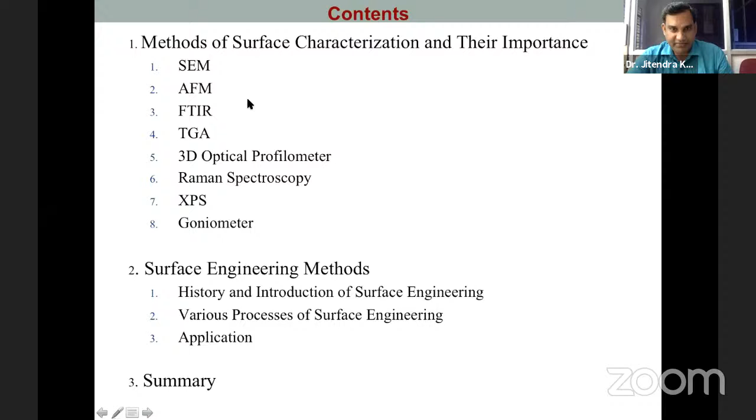So first, SEM is nothing but scanning electron microscopy, used for surface topography. The basic thing in scanning electron microscopy is that a high voltage electron beam falls over the surface, and when the high energy electron beam falls, it generates secondary electrons, as well as backscattered electrons, X-rays and Auger electrons. If the electron beam falls over the surface, you can see this type of envelope formed in that particular surface.

In this subsurface, Auger electrons are emitted, X-rays are also emitted, and secondary electrons from the surface are also emitted. These secondary electrons or backscattered electrons are very important in scanning electron microscopy. In Auger electron spectroscopy, we focus on Auger electrons. In X-ray, we focus on X-rays. So in one material, when the high intensity electron beam falls, every kind of electron is generated, but you take care of what kind you need, and the others, Auger electrons, X-rays and other things, you can suppress with the suppressor.

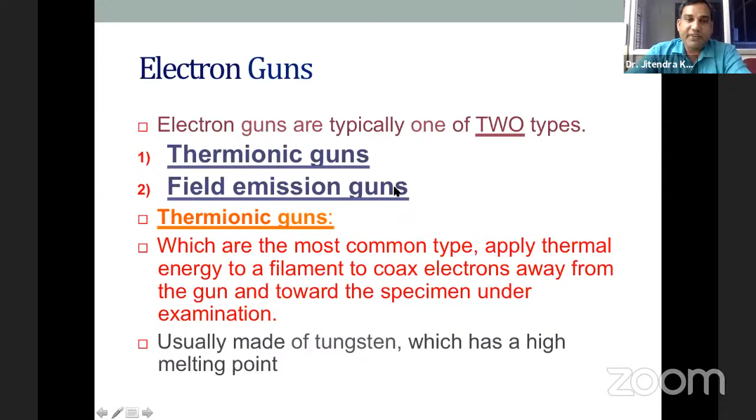So that's why field emission electrons are used, and this creates a strong electric field, so that your secondary electrons are generated and you will get a better surface topography. That's why everybody asks for field emission scanning electron microscopy images. And nowadays high resolution scanning electron microscopy has also come into the picture. So as you increase the intensity of the electron beam, your cost will also increase.

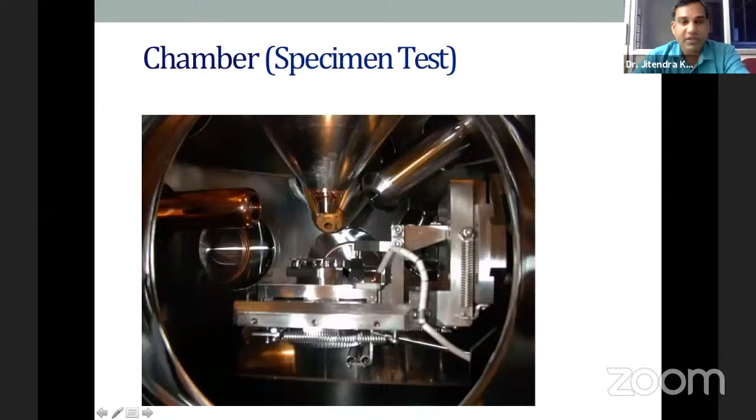So this is the close view of your specimen chamber, where you can hold your specimen. From the top, the high intensity electron beam falls over the sample, and these are the detectors. This is called a secondary electron detector, which can detect the secondary electrons emitted over the surface. This detector plays a very important role. It was developed by Everhart and Thornley, which is why it is known as the Everhart-Thornley detector, and it considers secondary electrons only; other electrons like backscattered, X-ray and Auger are suppressed by a suppressor.

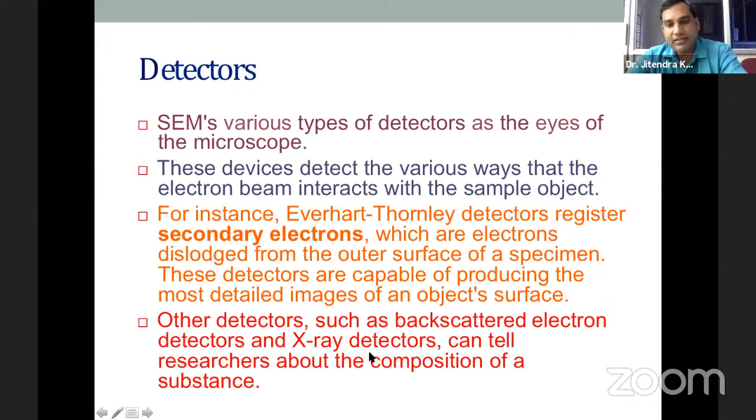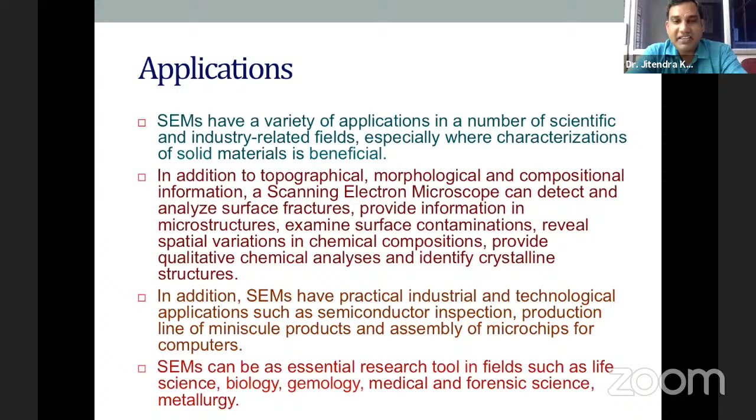So these are the segments you can see here. This is the EDS detector. You can generate very high intensity electrons and then perform the elemental analysis, and this is the backscattered electron and secondary electron detector. These detectors are very, very important when you capture any surface topography. Scanning electron microscopy has applications in every field, like life sciences, biology, gemology, medical, forensic science, metallurgy, and even mechanical engineering.

So I have taken a few sample surfaces of SU8 and its composite coating over glass, and this is the bulk coating which I fabricated to develop some MEMS devices. This is the work carried out by my PhD student, who recently submitted his thesis, and this work was published in the Friction journal.

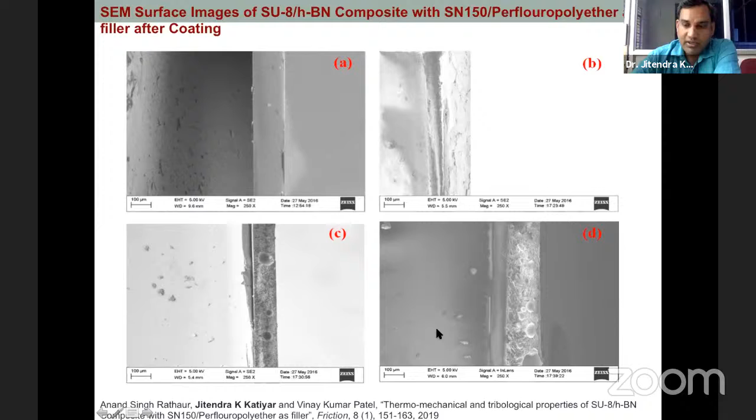So here you can see this surface coating: this is the substrate and this is the thickness of the coating, through which I can measure the thickness of the surface coating. And also, if I have added some liquid fillers inside the matrix, we can observe whether they are dispersed throughout the coating or not. That also we can analyze by this SEM micrograph.

And in this surface coating, when we added the liquid lubricant inside the solid matrix, the SU8 plus hBN, hexagonal boron nitride, matrix, we can observe the liquid perfectly dispersed throughout the surface. Due to this it gives a lower friction coefficient and high wear resistance of this coating. So this is the application of scanning electron microscopy.

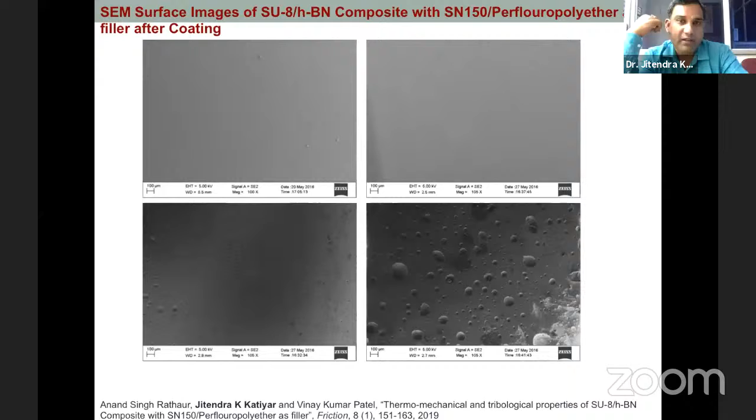Further, after scanning electron microscopy, we can also do some analysis by AFM. AFM, the atomic force microscope, is another important tool. Through AFM, you can observe the surface roughness of a nano coating or even a micro coating. Through AFM you can also generate the 2D surface roughness and the intensity of the particles, and further you can calculate the frictional force, nanotribometry, tribology, also through atomic force microscopy.

So this is another scanning probe microscope, and the atomic force microscope was developed by Binnig, by the simple means of contact mode. This atomic force microscopy gives you several aspects, like surface aspects and surface roughness. You can also calculate the friction between the atoms. You can draw the FD, friction force versus displacement of your tip. So this is a very important tool for atomic analysis, atomic force and atomic friction, and it is a widely used tool in tribology.

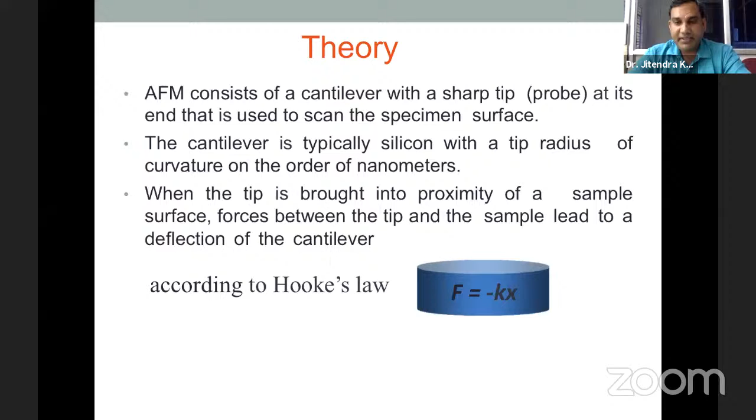Basically this tip works according to Hooke's law, and you can calculate the force between the tip and the sample surface by the deflection of the cantilever. The deflection of the cantilever due to the movement over the surface, we calculate by Hooke's law. So this is the kind of AFM tip which is used, and it is fabricated over a silicon wafer.

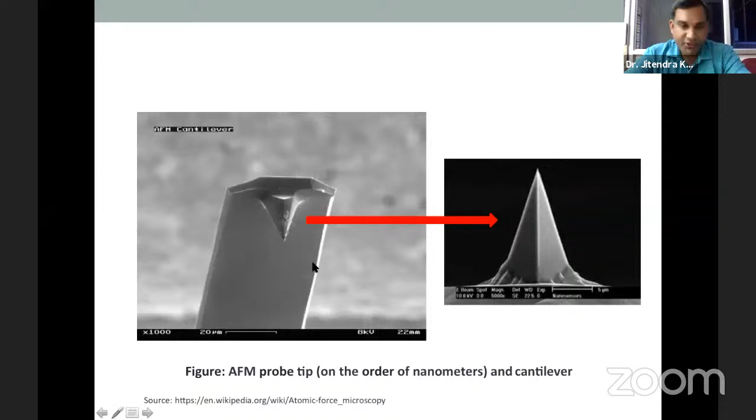In my PhD, I handled 3 pieces of equipment: this atomic force microscope, a scanning electron microscope and a 3D optical profilometer. These 3 instruments I personally handled, and I generated micrographs for students from other departments, like the biological department, who wanted analysis of their surfaces. One girl I know fabricated a foam with sol-gel technology, and I captured those images with this atomic force microscope.

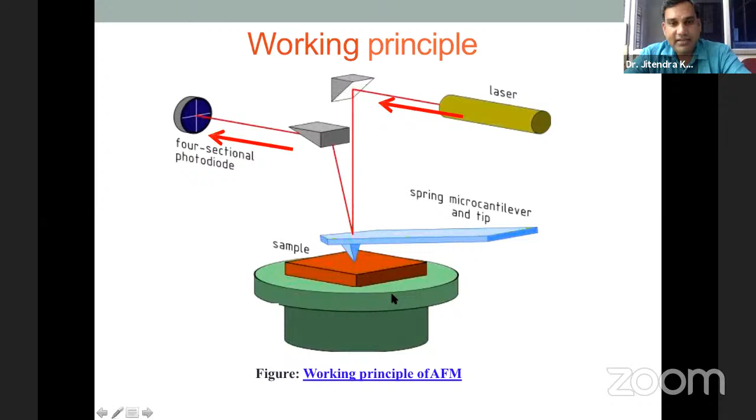So this is the basic feedback signal, when it moves over the surface in a raster scan. According to that, your cantilever tip moves over the surface. There are 3 modes we use in atomic force microscopy. If the surface roughness of the sample is very good, then you go for the contact mode. If your surface roughness is around 1 or 2 micron, then don't go for the contact mode, otherwise your tip will break.

So you choose which mode you want: contact mode, non-contact mode, or tapping mode. These are the 3 modes, and the selection of the tip is also different. All 3 modes have different types of tip, and one tip cost $50. That was in 2016. Nowadays I don't know what one tip costs.

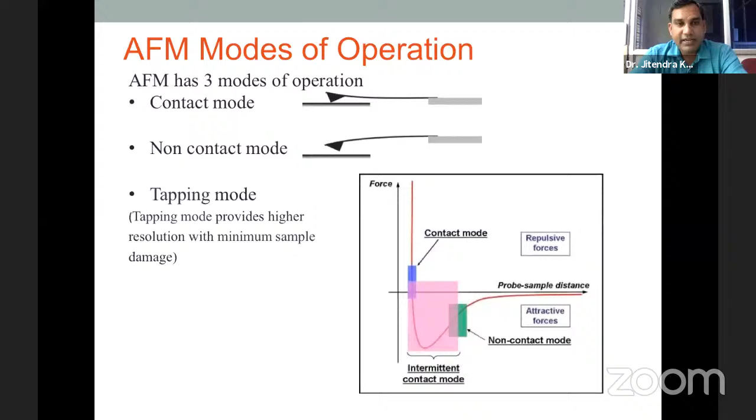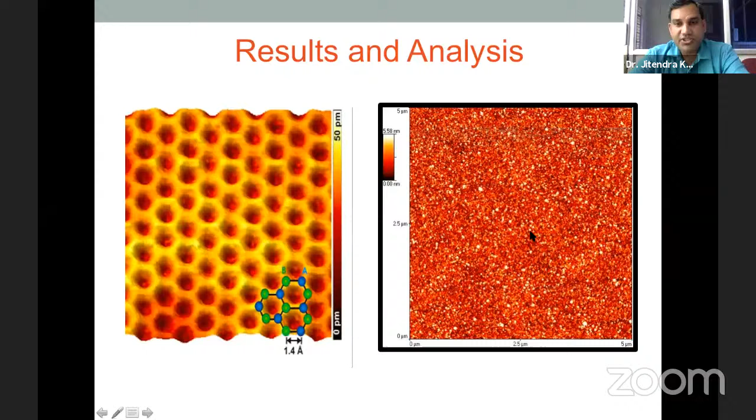For my own sample, I tested this SU8 and hexagonal boron nitride composite with liquid filler, and this gives me the insight that the coating I generated has nanotextures, because these nanotextures also play a very important role in wettability, increasing hydrophobicity and other properties, because the contact area is reduced, due to which the frictional forces are also reduced. So these types of images help me explain why the reduction in coefficient of friction happens, and the basic phenomena behind reduction of friction and increment of wear resistance. This can also help explain the wettability test, because this surface gives me more hydrophobic nature, approximately a 100-degree water contact angle.

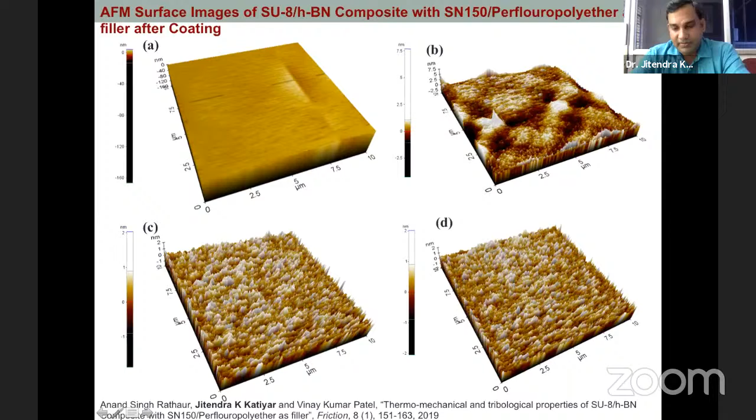Now another kind of surface characterization used is called FTIR. This FTIR is basically used to analyze the elemental bonding, whatever new bond formation happens in your sample, or what type of bond forms after mixing 5 to 6 compounds.

In that, the region from 0.8 micron to 2.5 micron is called near infrared. If you select this region, it's called medium infrared, ordinary infrared form. Far infrared is the distance between 50 micron to 200 micron. According to that, you can also calculate the functionalized group, whether any functionalized group is present in your compound or not. That you can also analyze using the FTIR method.

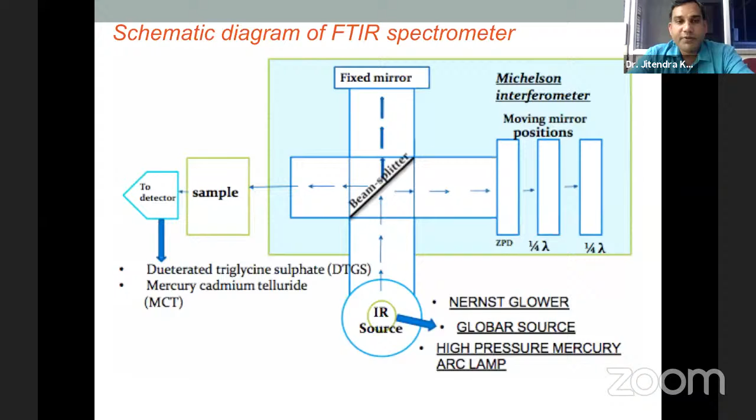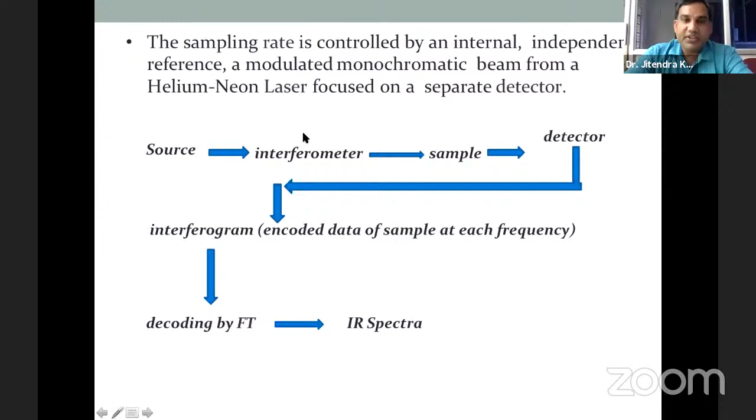The application of FTIR is either to identify organic compounds, structure determination, or chemical reactions. It's also used to analyze complex molecules - what molecules are present in your substrate. Sometimes a question is asked why a coating generates very smooth surfaces, or why adhesive nature is shown by a compound - FTIR analysis gives you a better picture of whether any new compound or formation has occurred on the surface. It's very good for explanation of whatever you are describing.

I performed this FTIR analysis on three carbon materials, and this was my first paper in my PhD, published in Tribology – Materials, Surfaces & Interfaces. In this paper, I chose three carbon materials and wanted to analyze which is the best carbon material among all - graphene, graphite, and MWCNT - which gives the lowest friction coefficient, and why.

I tested graphene, graphite, and MWCNT. According to the wavenumber and percentage transmission we tested, we observed that the hydroxyl group peak is very wide and large in the case of graphite, much less in graphene, and still present in MWCNT.

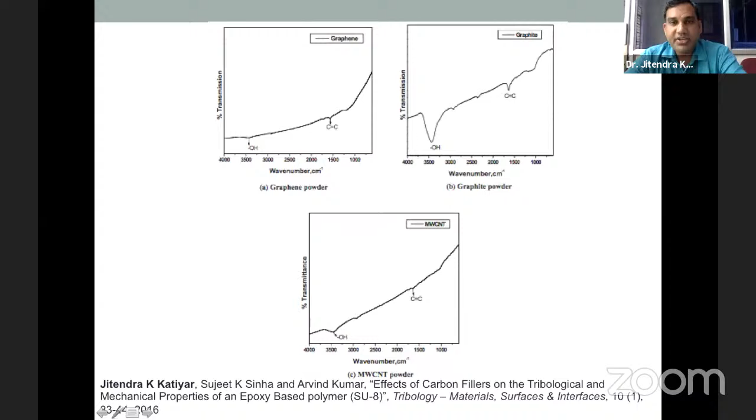Further, we move to another type of spectroscopy, Raman spectroscopy. In FTIR, what happens is the infrared falls over the surface and is absorbed by the atoms. Due to this absorption by atoms, sometimes if your coating is unknown or you don't know much about it...

...you don't know much about that particular coating, it's unknown. So don't go for FTIR in that case, because it will sometimes not give you the correct result. This is because the infrared is absorbed by the atom, and sometimes it won't give you the correct reason.

That's why Raman spectroscopy came into the picture. C.V. Raman discovered this Raman spectroscopy, and here also we use infrared sensors, but this infrared is not absorbed by the atoms present in the substrate. It only creates vibration, and due to that vibration in the atom, it can change the peaks and cause a shift in that particular peak.

It gives you very good results if you want to study new bond formation in your compound, or other analysis related to C double bond C, or what type of bond - sp2, sp3. These are the bond analyses we can generate by Raman, which gives more accurate results. But FTIR you will find easily, so FTIR is also acceptable in papers, but if you present Raman, nobody can question whatever you've mentioned, because it can generate the vibration between atoms, and the difference in wavelength between incident and scattered radiation corresponds to the wavelength in the mid IR region. So this is the basic difference between FTIR and Raman spectroscopy.

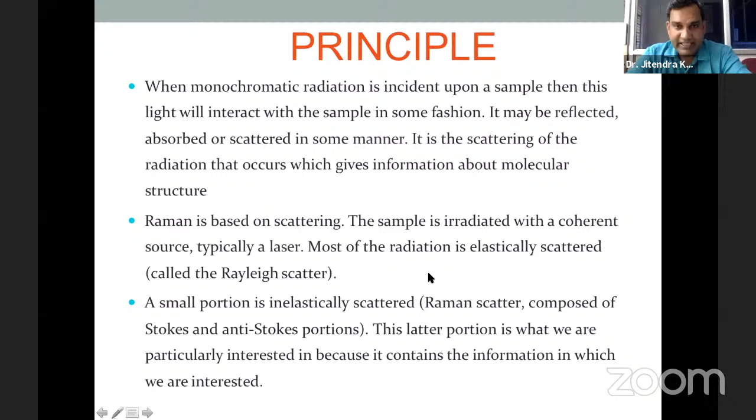There are three types of radiation generated in Raman spectroscopy: Stokes scattering, anti-Stokes scattering, and Rayleigh scattering. I hope you've already studied this in chemistry or physics - when an electron's energy causes it to move to a higher level, and then it moves back to a lower level, the difference between these two energy levels is called the Raman effect. This gives you the spectra of wavelength - this energy difference between the two rays gives you bond strength or compositional analysis.

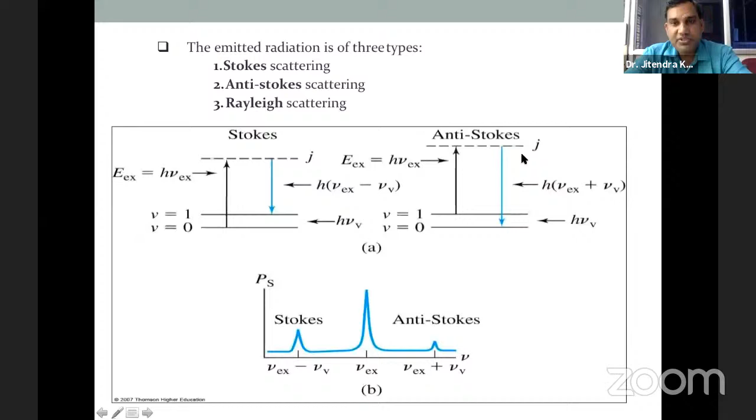These are the two basic things widely used in Raman spectroscopy. This is the basic instrument - here your sample, you just fall the laser over the sample, then different wavelengths are generated by the sample, and due to that particular wavelength, it gives you the wavelength spectrum.

Sorry to interrupt, one call is coming, just a moment.

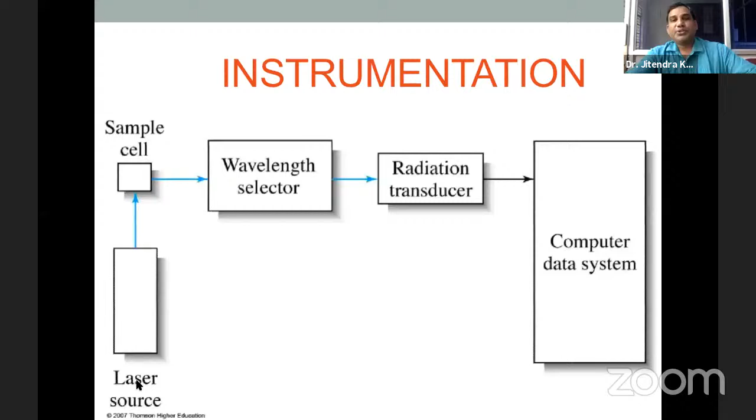Application of Raman spectroscopy is basically in analysis of structure, new bond formation, composition, and stability of coordination compounds, and it ranges in the 100 to 700 per centimeter range. This depends on the area and length - how much length the infrared falls over the surface - that's why this range is in per centimeter.

Vibrations are frequent in Raman, so we calculate this, and due to that vibration, two types of bands are formed. This band analysis is very, very important in your object - G band or D band. These G band and D band give you the ratio of sp3 to sp2 bond structure.

Sometimes the primary compound you've generated by Raman, but after some time, new formation after tribological testing, these peaks can be shifted. This shift of the peak also gives you a better result - this shift happens because it relates to lower coefficient of friction or higher wear resistance, or higher wear or higher coefficient of friction. So peak analysis is very important - sp2, sp3 structure can be obtained from Raman intensity versus wave number.

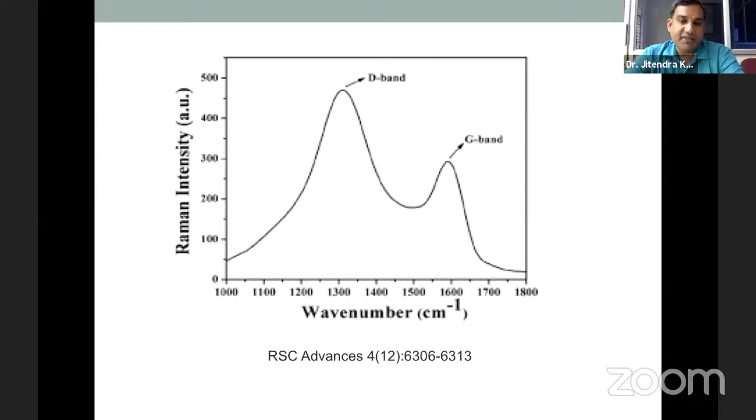Next we move to thermogravimetric analysis (TGA). Here we check the thermal stability of any compound, even if we develop new coatings - what is the thermal stability of those coatings? That is very important in any paper, and widely asked about. If you want to use those coatings in a turbine, which runs at approximately 1000 degrees centigrade, TGA plays a very important role. If your coating doesn't sustain up to more than 1000 degrees centigrade, then that coating is useless.

But those can also be used, though lower than 1000 degrees centigrade. For a particular application, when you decide the area where you want to work, the thermal stability of that particular composite, coating or compound is very important. Here, with respect to temperature, you can obtain the weight loss. This weight loss according to the temperature gives you the thermogram.

With TGA you can also state whether the reaction is exothermic or endothermic, so whether heat is generated or absorbed. That is also a very important statement in any tribological analysis. This is the instrument where you keep whatever sample you want to test, and it goes inside the crucible. You pour your sample, and that crucible is connected with the balance.

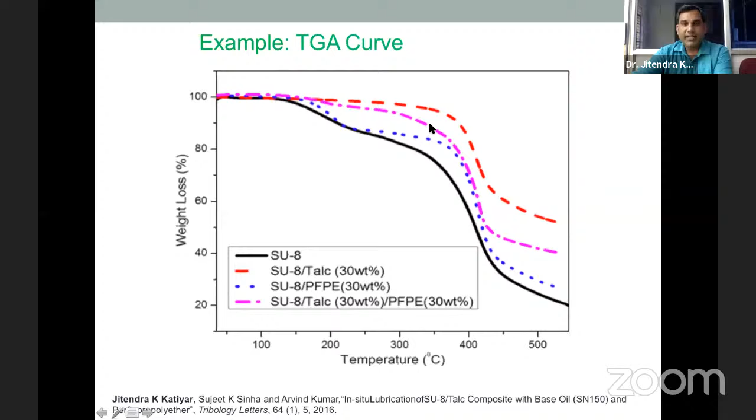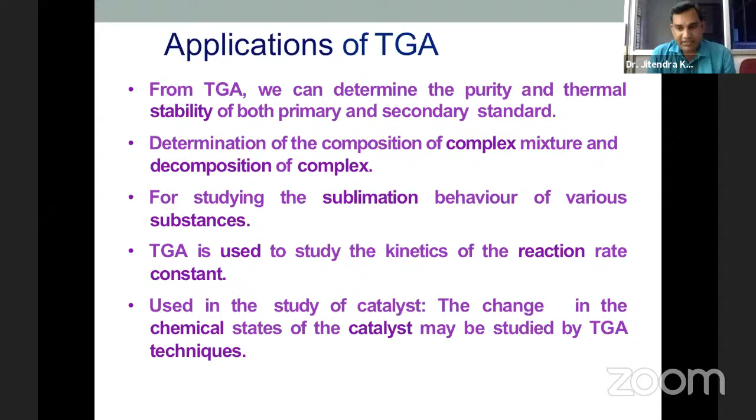So it is used to study the catalyst, the change in the chemical state. TGA basically tells you about the thermal stability of your component, and it can also tell you what type of reaction happened at high temperature or whatever the temperature, either exothermic reaction or endothermic reaction.

And this is another surface topographic technique, the profilometer. I also worked on this at IIT Kanpur, and I was an expert user in that area. The profilometer works on the principle of Newton fringes. Interference occurs because the light source falls on the surface, and this interference gives you bright fringes and dark fringes. The path difference between these bright and dark fringes gives you the surface topography.

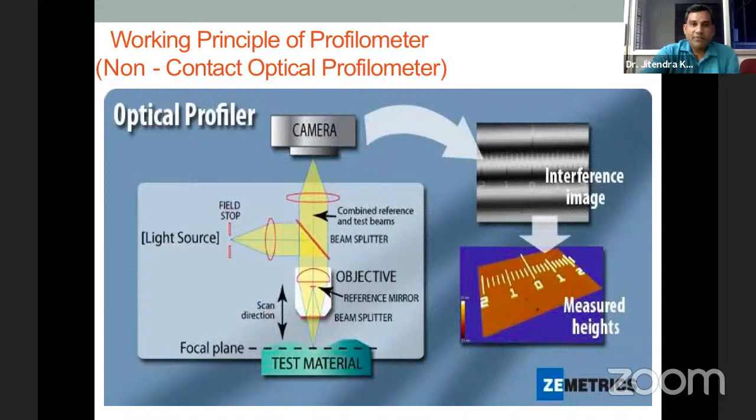So first fringes form on the surface, and then fringes form on the depth. If you have some cavity on the surface, first your fringes will form on the top surface, and the bottom surface fringes will form last. In that way you can analyze the step height with this profilometer. So this is the basic principle: the interference between bright and dark fringes gives you the surface topography, surface roughness, and also step height.

This profilometer is basically used to give you the three-dimensional structure and all types of surface roughness, Ra, Rz, Rsq, Rt, and you can also calculate the step height, the coating thickness to some extent, but the SEM image gives you a better picture of the coating surface.

In coating analysis, you just erode some coating material from the substrate, and it generally makes this type of step. So what is this step height? You can calculate that with the 3D optical profilometer, and more or less it can give you the average thickness of your coating.

This 3D optical profilometer works in two modes: phase shift PSI mode and vertical scanning VSI mode. VSI mode is generally used if your surface roughness is in microns and you can observe it with your naked eye, where surface roughness is higher. But when you observe a very smooth surface, PSI mode is used, and PSI mode gives you more accurate results than VSI mode. That is the only difference between these two modes.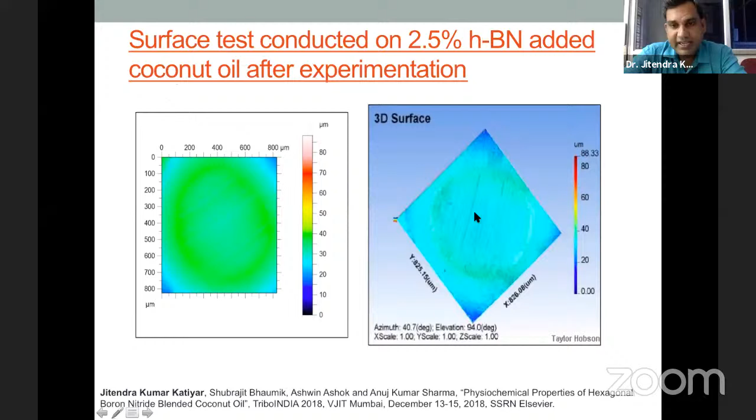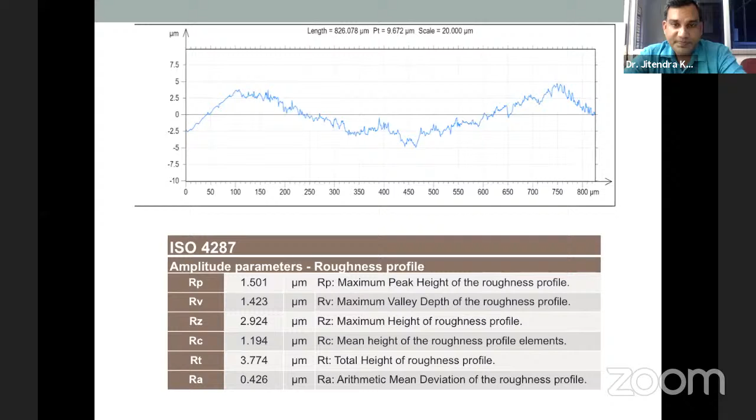And in this way we can also check the 2D graph, and this 2D graph also gives me the depth of the wear scar which is generated. So this is our level, and what is the depth of the wear scar which is generated, what is the depth in between here, that also you can calculate by this one. And this Ra value is very, very important for roughness. Other values are there, but mostly we just show the Ra value in any paper. So that is the 3D optical profilometer.

Now we move to the XPS. In scanning electron microscopy, we also perform the elemental analysis, but that elemental analysis is not that much accurate, because sometimes oxygen is one element that always comes in when you perform EDS analysis by the SEM. So we manually remove the unwanted elements for your sample, and you know better what the composition in your sample is. Then only you can select the elements manually in that EDS analysis. So that is also acceptable, but not that much acceptable.

If you can show the XPS data, then nobody questions you whether that element is present or not, because XPS gives you very accurate data, so XPS is performed rather than the EDS analysis. Both are used for elemental analysis, how much percentage of which element is present. XPS is used even when you don't know the composition. So for unknown composition, unknown material, you go for the XPS. That gives you the correct result.

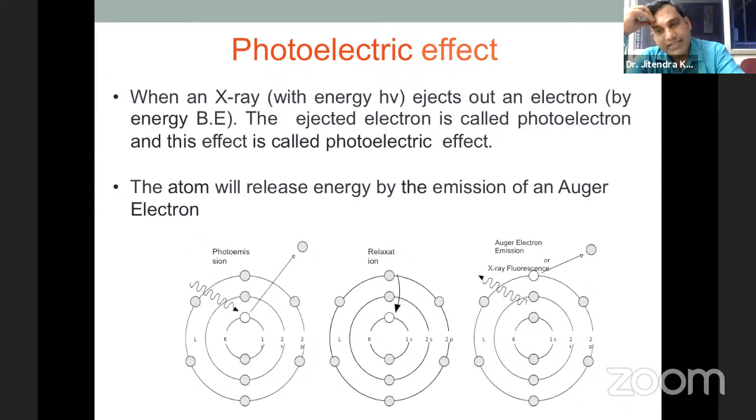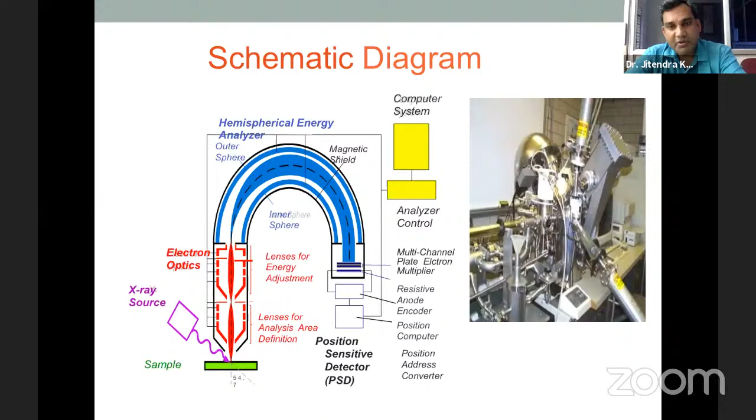So this is the basic setup of XPS, and very complicated sensors are used here. We apply the samples, then the X-ray source, and the generated electrons are captured by the detector. Each material has a different wavelength, and according to that we capture it in peak form. You generate the signals at a particular electron volt energy, and in this way you can analyze what type of element is present in that component, according to the wavelength and concentration.

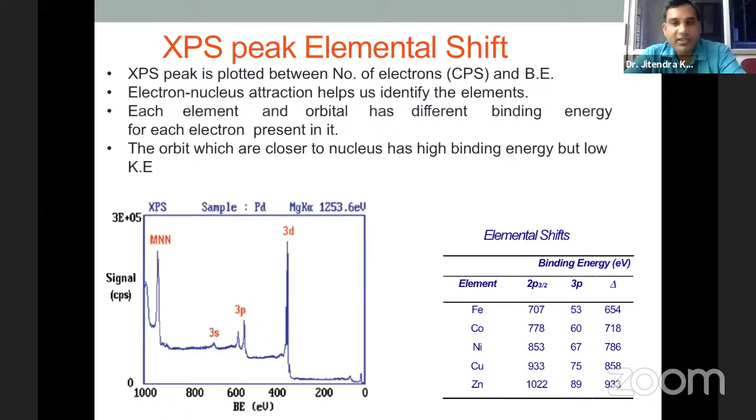Iron, cobalt, nickel, copper, zinc. So these are the few elements present in this particular compound or component. So if you don't know the composition of any material, then go for XPS. And further, you can also check the chemical shift, what type of bonding is present in that particular one. That bonding you can also analyze by XPS analysis.

So these are the applications: even in industry, failure analysis, polymer surfaces, corrosion, adhesion, semiconductors, dielectric materials, thin film coatings. XPS is used widely, and it can also be used to measure the elemental composition of the surface, 1 to 12 nanometers. So surface preparation is also very important for XPS analysis, and it can give you the chemical or electronic state of each component. So these are the analyses which can be performed using XPS.

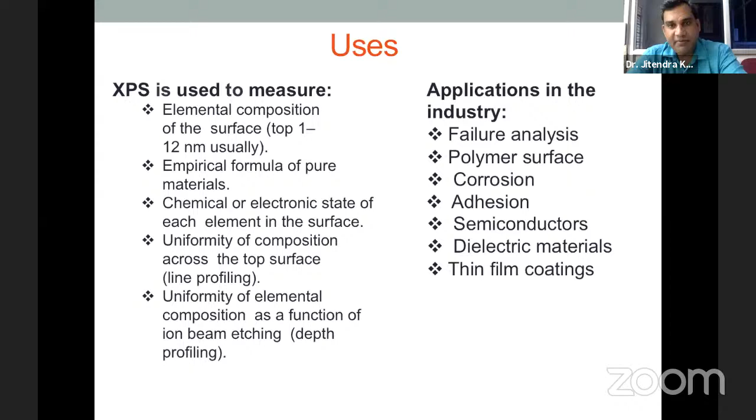So next, if you perform a coating, then we check whether the coating surface shows hydrophobic or hydrophilic nature. So this is the goniometer which is used here. This is a manual goniometer. Here you can move by this wheel according to this tray. And here you keep your sample, and from the top you drop your water droplet. That is 2 microliters, the volume of the drop that falls over the surface.

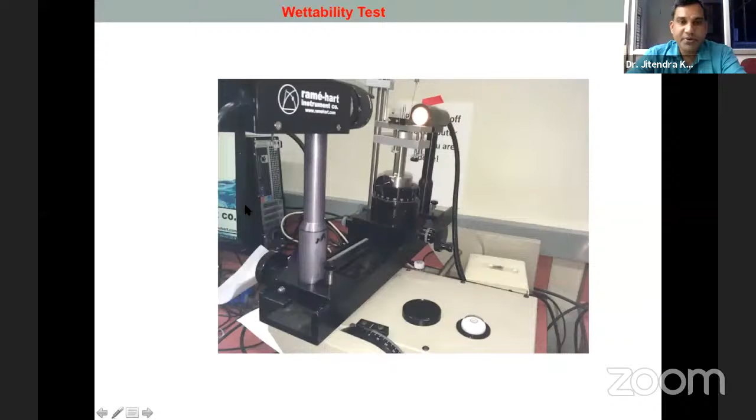In that, I see that SU8 HBN with PFP gives a more hydrophobic surface, and AFM analysis also shows nanotextures, and those nanotextures help make the surface very hydrophobic. This surface also gives me better wear resistance and a lower friction coefficient. So this wettability analysis is required for checking the surface energy and the characteristic of the surface, whether it is hydrophilic or hydrophobic in nature.

So these are the few surface treatment processes which I showed you. Further, there are several physical characterization processes, then mechanical characterization processes like impact test, Charpy test, Izod test, tensile test, nano indentation test, micro indentation test. So those are the mechanical characterization tests.

Then you can also perform physical characterization. If you are working with a composite, then you can also use the absorption test. What is the densification in that particular one? So density analysis, then viscosity analysis. So these are a few characterizations that come under the physical mode.

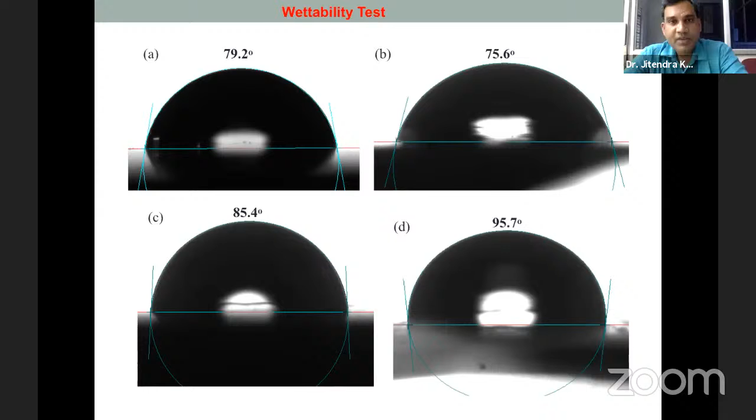over the surface. And around 1960, ion plating was developed, and this also gives some plasma-assisted coating in deposition. And in the early 1970s, film deposition and plasma processes were developed. So this is a very brief history of surface engineering.

So what is the meaning of surface engineering? It means you modify the surface. You are not modifying the whole bulk material. You are modifying only the surface, like a coconut shell. Inside the coconut shell, the coconut is very soft, but outside it is very hard. So you are not modifying the complete material, you are modifying the surface.

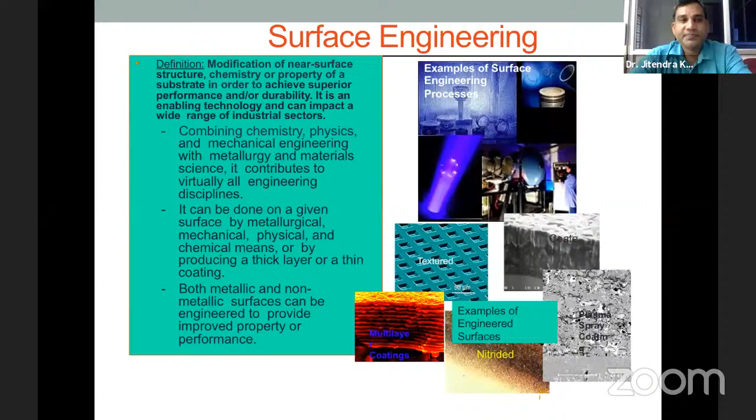substrate. So why is surface engineering important in tribology? Any engineering component usually fails when its surface cannot adequately withstand the external forces, and these external forces may be environmental or other conditions, also humidity, temperature, pressure, so that sustain that particular external surface of any component. That's why surface engineering is very important.

So improving the functionality of an existing product is one aim of surface engineering. You can improve the functionality of the surface so that your surface behaves like a super hydrophobic surface. Like Professor Murty said, he developed some coatings which are self-cleaning coatings on the glass surface. So that is also a part of surface engineering.

So surface engineering can generate functionalized coatings also, so that you can make more hydrophobic or super hydrophobic surfaces, so that your dust will not stick because it can roll over the surface. So that's why surface engineering is very, very important.

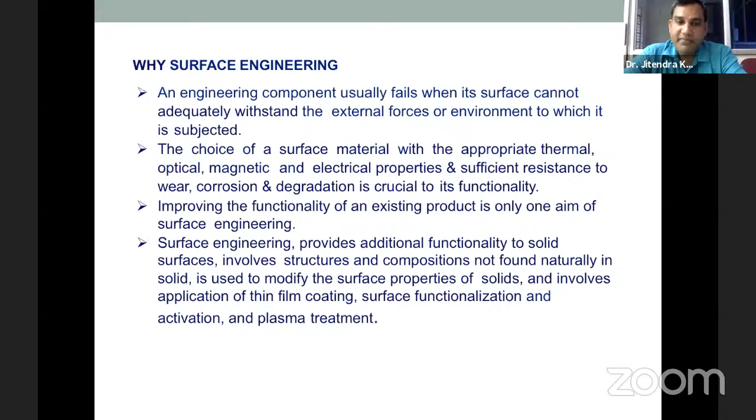So a surface engineered component gives you high product life, improved surface resistance, satisfies the customer need, reduces maintenance, improves the appearance also, improves solderability, and metallizes plastic component surfaces also. Means you have a plastic component and over that you just coat the metal. So that is also used nowadays.

So there are numerous applications of surface engineering in the form of cutting tools, forming dies, decoration purposes, automotive industry, biomedical industry, to make the coating of the femur head with the hip and knee joint. So these are the various applications of surface engineering where you can perform a nano coating only. Even the hard disk we are using has a 10 nanometer coating, and how you can improve the performance of your hard disk, that is also very important.

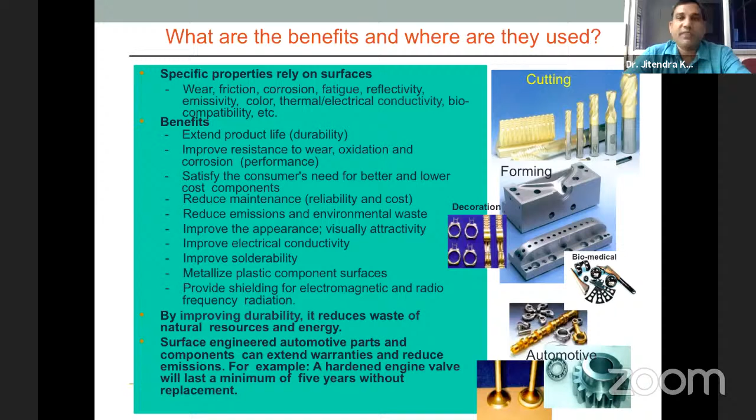So surface modification is nothing but modifying the surface without changing the material chemically. So how can you modify the surface? By thermal process, by mechanical process, or other processes, means chemical electro etching, laser engraving. And mechanical processes: changing the surface by texturing, using machining and blasting, and surface peening, shot blasting, explosive hardening. So these are the various mechanical processes which are used in the automotive industry.

And thermal process, like you can do the heat treatment process. In heat treatment, hardening is one process which can improve the surface by nitriding flame or carburizing flame according to what type of material you want to harden. So laser beam is used, flame is used, induction furnace is used to apply the temperature, and then you can harden the surface. So that's why it is called a thermal process, the surface heat treatment process in material science.

So hardening is one heat treatment process which can modify the surface without changing the material chemically. Surface modification is also done by changing the surface chemistry only. So these are the various thermochemical diffusion processes like carburizing, carbonitriding, nitriding, boronizing. In all these processes, a new element goes to interstitial positions. Further, we use chromizing to improve the wear resistance, and siliconizing, and several types of powder you can incorporate in the substitutional positions of the subsurface.

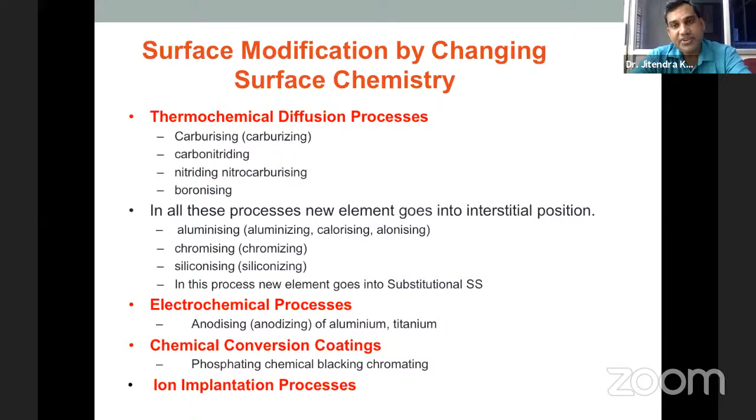So there are also electrochemical processes, chemical conversion and ion implantation processes. These are the various processes used in surface modification to change the surface chemistry, not the subsurface chemistry. So what we will do is change the surface without changing the material chemically. Surface modification by altering the surface chemistry, and surface modification by adding new material onto the surface in the form of coating. So that is known as surface engineering processes.

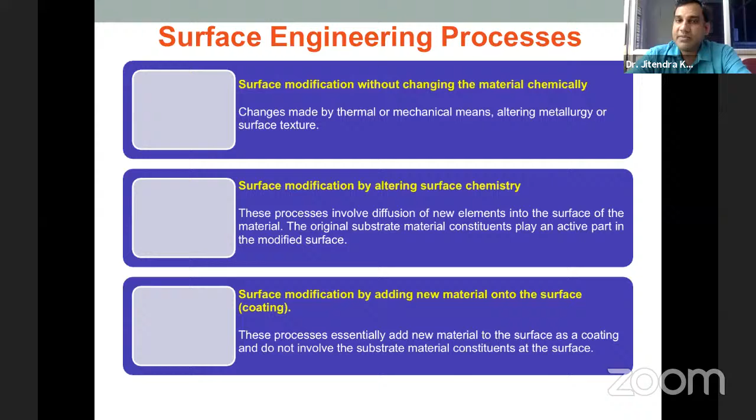So the evolution and significance of surface engineering did not start nowadays. It started in 1980, when we improved the surface of single component and multi-component, multi-layers.

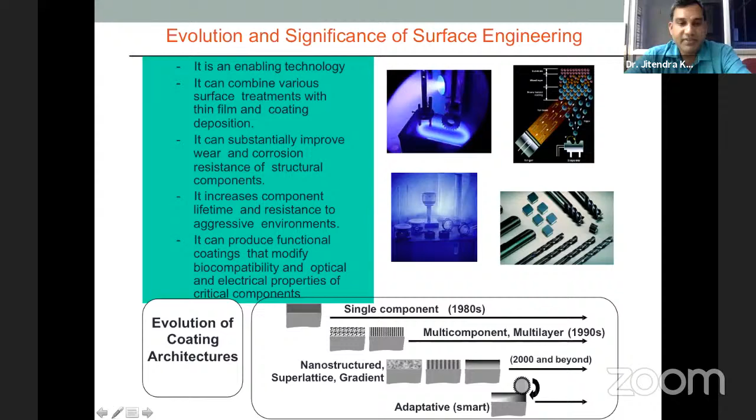Nowadays smart materials come into the market, high entropy alloys and other things come into the picture. So surface engineering plays a very important role, and various methods are used. In these pictures, you can see plasma falling over the surface, treated in this plasma environment to improve the surface property.

So another thing is material property. There are two types of characterization: either you want to go for bulk or for surface. If you go for bulk, it gives you strength, density, and ductility. If you go for surface only, then hardness, friction, wear, corrosion, and oxidation. So surface engineering is basically focused on these aspects.

So surface properties like how you can improve corrosion resistance, oxidation resistance, wear resistance, erosion or abrasion, hardness and conductivity. Sometimes it is also very important to know the difference between corrosion and erosion.

Corrosion occurs only by chemical reaction. If a chemical environment is there, then only corrosion will happen over the surface. But erosion happens either by physical means or chemical means. That's why in electric discharge machining, because of the dielectric between tool and workpiece, that erodes the material - melting, evaporation, and erosion. So mostly we call it erosion if there is physical or chemical phenomena, but corrosion is very limited - that only occurs if there is a chemical present, then only corrosion will happen.

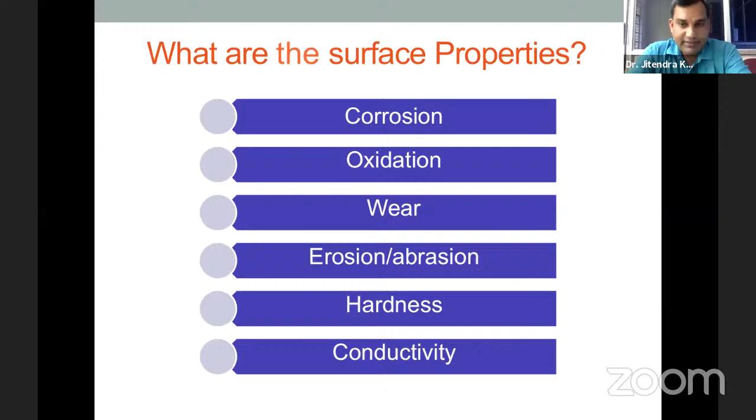So these are the thicknesses, how you can select the thickness according to different coating techniques. That is very important - according to the thickness you want, you just select the particular process: either chemical vapor deposition, physical vapor deposition, ion implantation, chemical process, thermal spray process, and welding. These are the various coating techniques. Welding means laser cladding also - it includes laser welding and other processes.

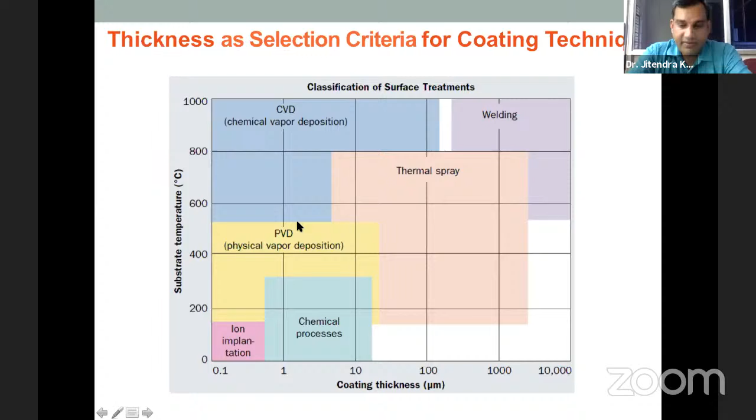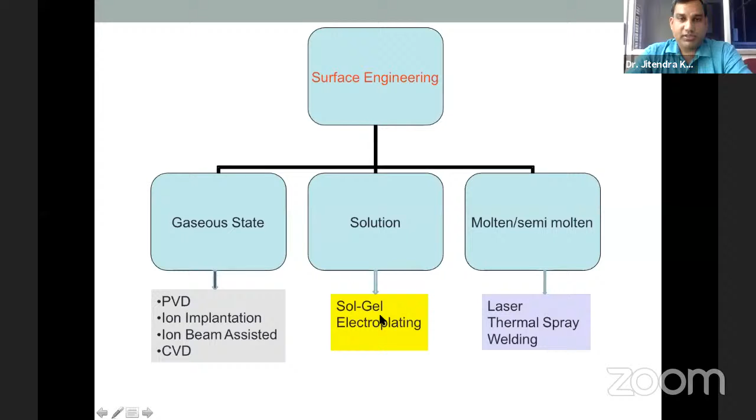So according to what thickness you want, we select different processes. Surface engineering gives you different states - gaseous, molten, semi-molten, and solutions like sol-gel method, electroplating, molten and semi-molten laser cladding, thermal spray coating, welding. In gaseous state, we use physical vapor deposition, ion implantation, ion beam assisted, focused ion beam assisted, and chemical vapor deposition. Here we evaporate the material, and that evaporated material coats over the surface. So these are the gaseous state, molten state, and solution state - the various processes used in surface engineering.

So the mechanism behind the coating - either you can diffuse the coating, or mechanically bond between the surface and whatever coating is there. Different kinds of coating: CVD, PVD, and thermal spray. In thermal spray, you get interlocking because of the diffusion of the material - high temperature impact particles fall over the substrate, and that interlocks because of diffusion. Because of the high temperature, it can diffuse into the surface, so that's why this is called diffusion coating. But in case of CVD and PVD, you mechanically bond between the surface and subsurface.

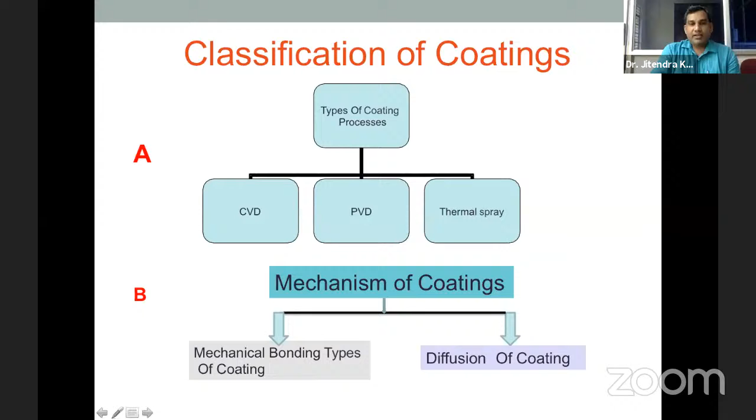Because of this mechanical bonding, whatever coating falls over the surface, the best thing is if you can functionalize the surface by using an oxygen plasma cleaner. Then the mechanical bonding is better, because the oxygen plasma cleaner can generate OH groups over the surface, and if you coat that, it bonds mechanically stronger. Otherwise it can detach after some time.

So it's an important parameter to optimize, to control the properties of substrate, coating, and interface. These are the few things: whatever you want to go in bulk for coating, what is the cohesive strength, stresses generated, adhesion, defects, or multi-layers, coating surface roughness, erosion rate, friction, porosity, or corrosion.

Interface means between two particular coatings, we check the adhesion. This adhesion we can check at the interface between two coatings by the pull-off force, which we can generate using atomic force microscopy. We apply a very heavy load over the surface, because these coatings are 10 nanometer or 20 nanometer, so it can stretch out. At what load your coating detaches from the surface, that is called the pull-off force analysis using atomic force microscopy.

And roughness, cleanliness, expansion mismatch - these are various parameters according to the different regimes of substrate, interface, and coating. So this was the first method developed around 1960, the plasma and ion-based surface engineering technique.

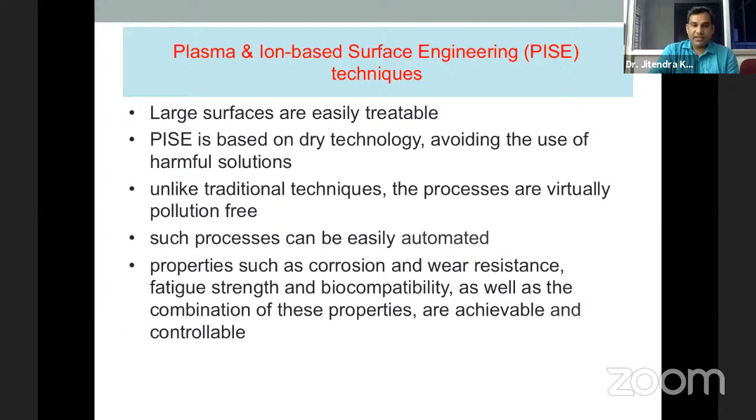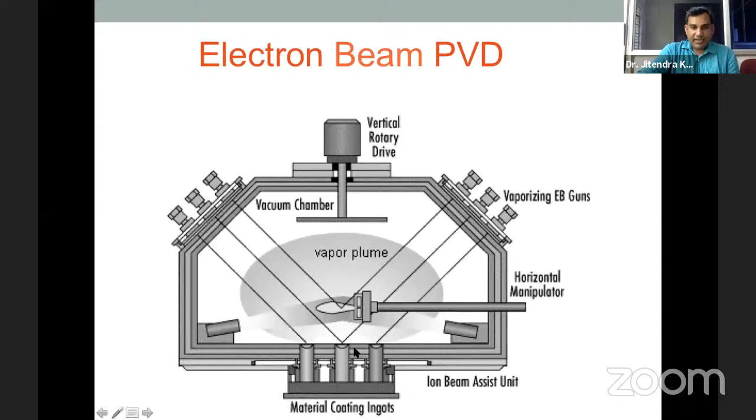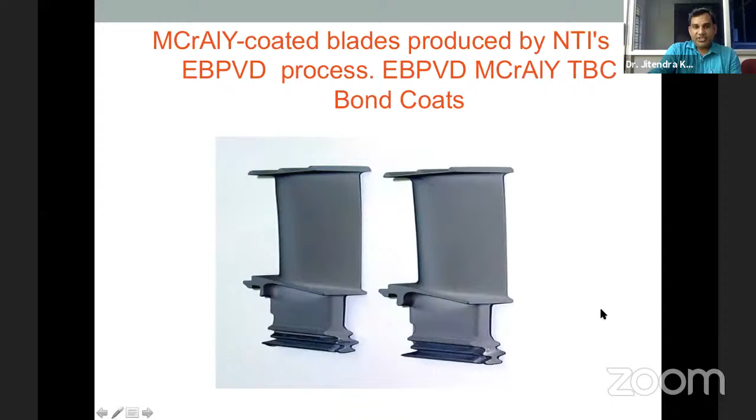This is another type of coating method, electron beam physical vapor deposition, where the electron beam falls over the surface. There's a horizontal manipulator, a detector, a vertical rotary drive, and a vacuum chamber. Inside, you generate a vacuum, and the material you want to coat over the surface vaporizes and melts, coming out over the surface to generate the coating. Different nickel, chromium based, or MCrAlY coatings can be generated by using this method.

Another method used is the plasma etching process. By using this method over the surface, we can improve the adhesive property of the surface. First, we clean and activate the surface using this plasma etching process - an oxygen plasma cleaner. You send your clean sample, cleaned with acetone, into the plasma cleaner, which cleans foreign particles by exposing the surface to plasma, and also generates OH groups over the surface. This improves the adhesive property, so when you apply some coating, it easily adheres if you have applied this plasma etching process.

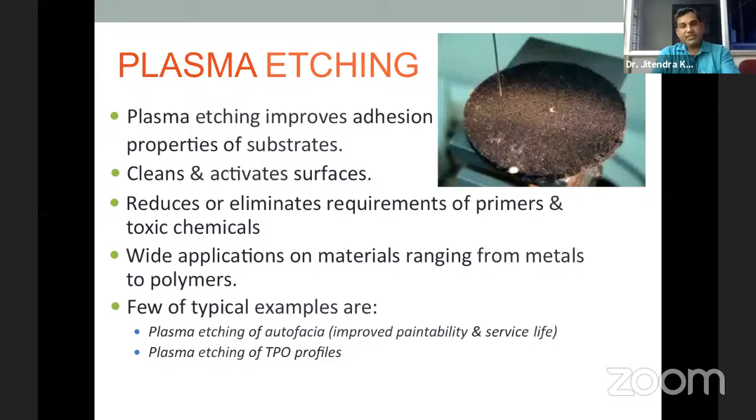This also depends on time, and it is a good research area in nanotechnology - according to the time duration of exposure, surface quality depends on it. So how much time you expose the plasma over the surface is also one parameter necessary to optimize. These are another part of the plasma nitriding process.

So crankshaft and connecting rod, cam, hot extrusion dies, mold locking plates, all are surface hardened by this plasma nitriding. This is the equipment with a vacuum chamber, where the plasma is generated, and that plasma makes the surface harder for these different kinds of materials. So this is the experimental setup, and this is how this plasma nitriding facility looks like in industry.

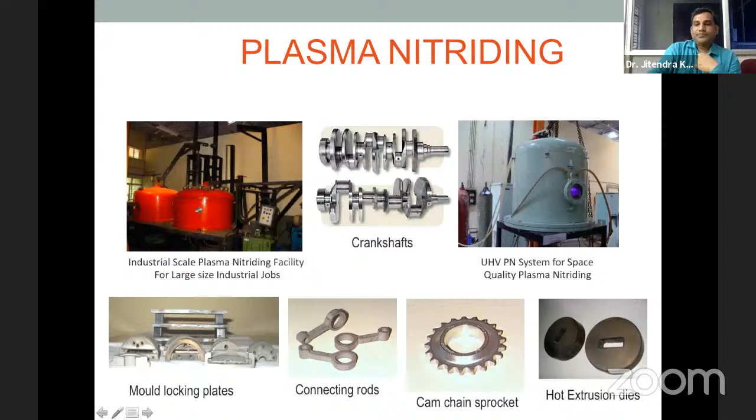Another kind of improvement is thermal spray coating or plasma spray. You have inert gases that generate the plasma, and into that plasma you feed the powder. Because of the high kinetic energy, this powder goes to the substrate and diffuses the surface of the material, creating a coating. You can generate this by thermal spray coating at approximately 20 micrometers, and coat alloys, ceramics, plastics and composites over the surface using these methods.

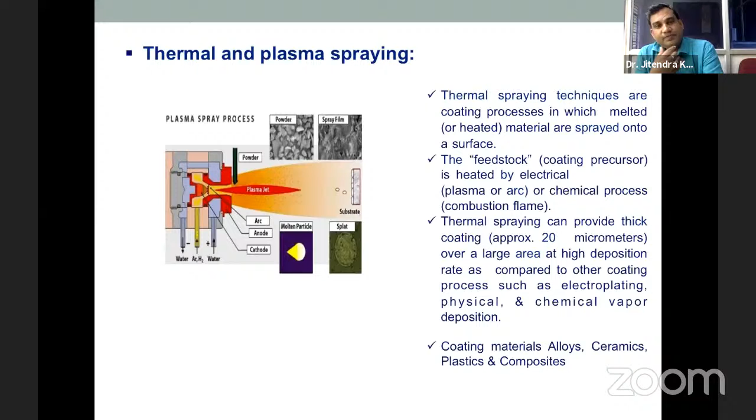The main important parameter is feed stock. Like in olden days at the atta chakki, they just open the mouth and let a certain amount of wheat go inside to be crushed. Similarly, the feed stock is very important - how much particle concentration you require to send is very, very important. This feed stock is also costly, around 20,000 USD for one feed stock. So these are the various types of plasma and thermal spray.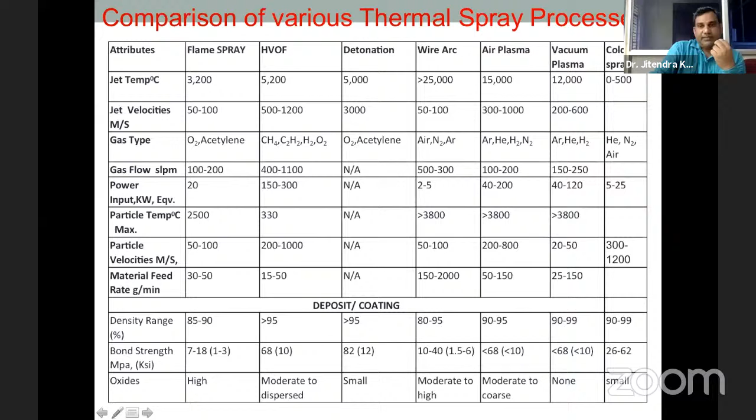So there's a comparison of the various thermal spray processes, and what temperature is used in between, according to which type of thermal spray process is necessary to use in your research work. In the columns you can see the various processes: air plasma, vacuum plasma, detonation, HVOF, flame spray, and in the rows you can see the attributes. According to the need of temperature, we choose the different plasma spray processes for the surface.

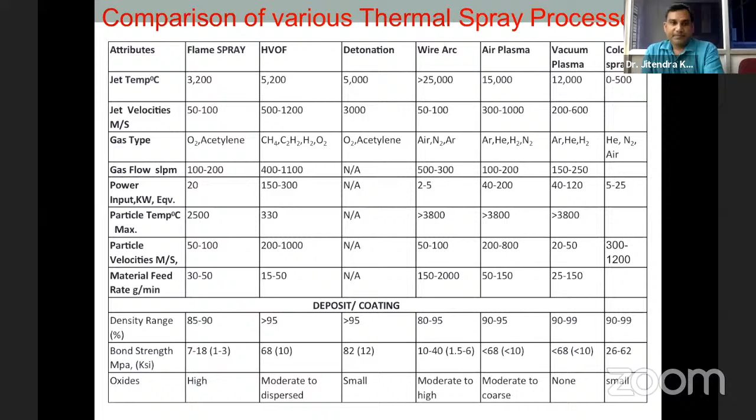Now we move to another kind of advanced coating technology, like physical vapor deposition and chemical vapor deposition. These are used for nano coating generation. Physical vapor deposition works with a crucible, and the whole process is performed in a vacuum chamber. In that vacuum chamber there is a heating filament, and you keep the material you want to coat, say gold, over the substrate.

At the top you keep your substrate material, and here you keep maybe 1 milligram of gold, or less, or silver, whatever material. That material melts and after melting it evaporates. At the time of evaporation, your substrate at the top accumulates those evaporated particles and the coating is generated. After that, you perform mechanical characterization using atomic force microscopy, surface topography scanning, and other factors.

So PVD and CVD are widely used in surface engineering to generate coatings of different materials, even compounds. These PVD methods improve hardness, wear resistance, and oxidation resistance, and are widely used in aerospace, automotive, surgical industry, dies and mold industry, metal cutting industry, firearms, optics, and watches. These types of coating are widely used nowadays. You've seen your watch glass, or your optics, have scratch resistance - this happens because of physical vapor deposition or chemical vapor deposition.

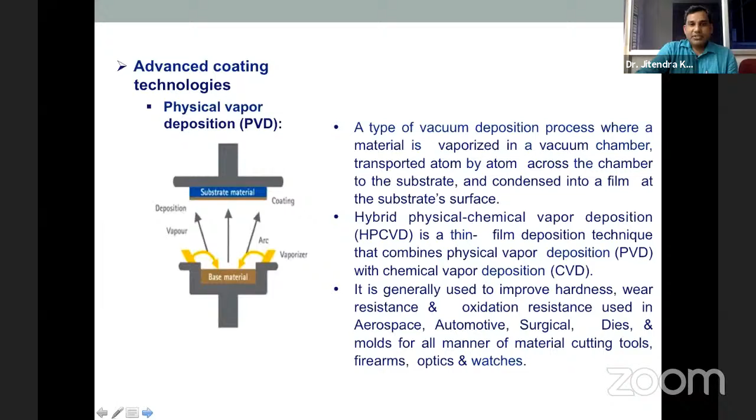According to the necessary actions and application, we select the process. This is the basic principle: how plasma is generated, evaporates the material, and we coat the film. This film can be seen using scanning atomic force microscopy, through which you can see how the atoms are homogeneously dispersed over the complete surface.

So this physical vapor deposition is performed in the vacuum. So this is the example. Another process is chemical vapor deposition. We just provide the chemical precursors, and this is the exhaust, and this tray, and the resistance heater. In between, you just pass the gas inlet, and then according to that, we just coat the material chemically.

So it is used in various forms, including monocrystalline, polycrystalline, amorphous, and epitaxial coating over the surface. In typical CVD, the wafer is exposed to one or more volatile precursors. So we just use the precursor gases, and those precursor gases react over the surface, and due to that particular reaction, they chemically change the surface. That's why it is called chemical vapor deposition. So what type of precursor gases we are using, that is very, very important.

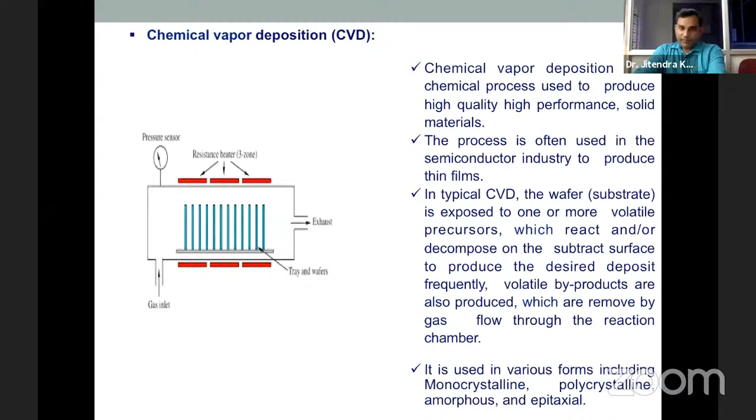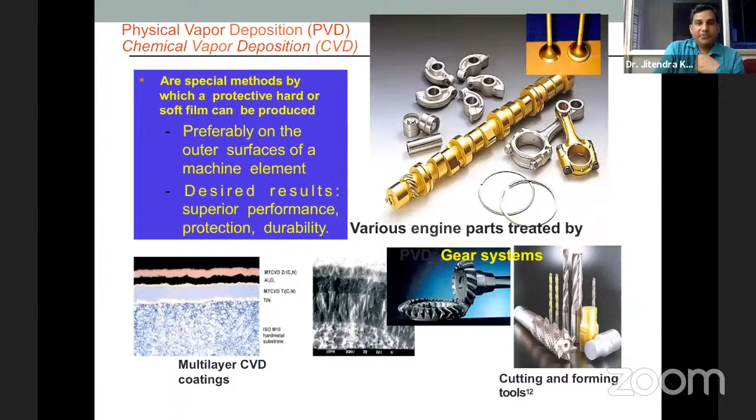So these are the various applications of PVD and CVD coating in the gear industry, cutting tool industry, in the automotive industry, and also computer industries for coating of the hard disk. So the future direction of CVD coating is like 1980s, and then nanotexture-generated smart materials, and nowadays self-cleaning or self-sustainable coatings, self-healing coatings. So that is called smart materials.

So novel coating architecture for the 21st century is like this foam-based coating, this nano-composite coating over the surface, this texture type. This is the fingerprint; how these nanotextures can be presented over the surface by this type of coating to improve the surface property, like improving the hydrophobicity. So these are the different kinds of novel coatings for the 21st century using PVD and CVD coating.

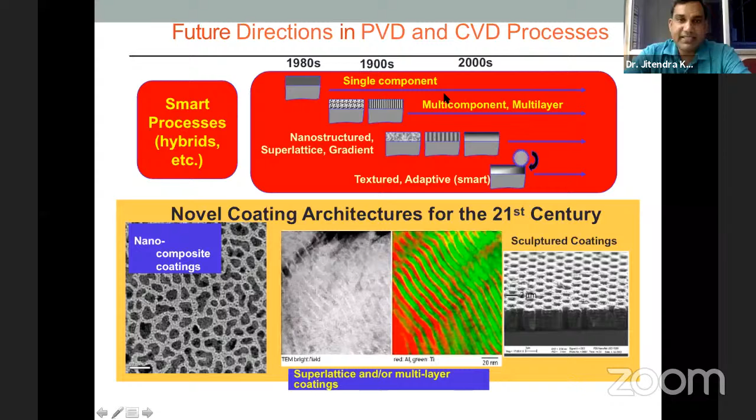So the last part of my talk: now we move to laser cladding, and this I have used in my work. In that, I made the coating with the laser by spreading the powder, and this laser travels over it, and it can melt and solidify it, and you can generate a thin layer. But the problem in laser cladding is distortion and dilution. If you can optimize the parameters, then you will not get these types of defects over the surface. Otherwise, distortion and dilution are the biggest defects in laser cladding.

So in laser cladding, you just clad the surface by laser, and this is the powder feed with the laser. Sometimes the laser doesn't have the powder feed facility. Then you can spread the powder, but in that case you will not control the concentration of the powder. So this nozzle is very, very important, how you design this nozzle. The powder is spread through this nozzle, and your laser beam also passes, and this can solidify over the surface. That is called laser cladding.

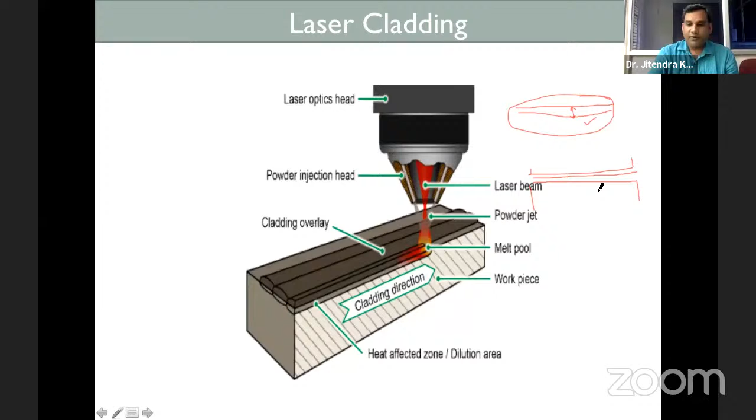So if you use the buffer layer between the coating and the substrate, you can reduce the distortion effect. Also, you can improve the bonding strength between the coating and the substrate. That's why the buffer layer is very important. Recently, one paper was published in Materials Science and Engineering B on Inconel coating, where we performed the coating using a buffer layer. That is also available on my Google Scholar, if you are interested.

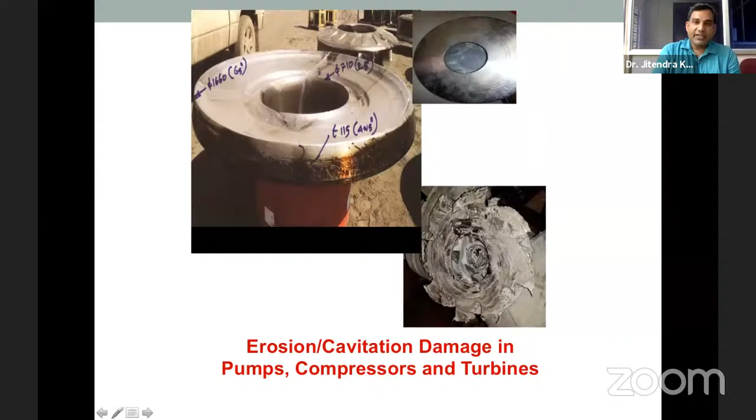So laser cladding is widely used against erosion and cavitation in hydro turbines to improve the surface so that it will not wear out very fast. So turbine blades and hydro turbine blades also use laser cladding or thermal spray coating to protect them from the environment.

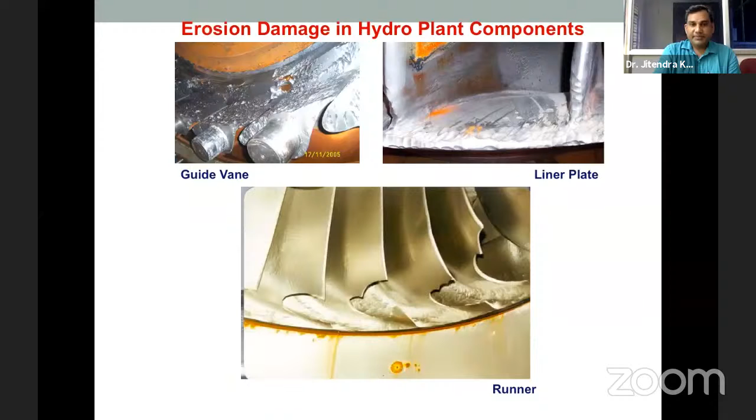in that industry. So this is the complete summary of my talk on surface engineering. Either you can modify the surface by using thermal means, thermochemical means, or mechanical means, by shot peening, laser peening, surface texturing, or by means of coating. So these coatings are either thermal coatings, mechanical coatings, thermomechanical, chemical, electrochemical, or combined coatings, or ion implantation.

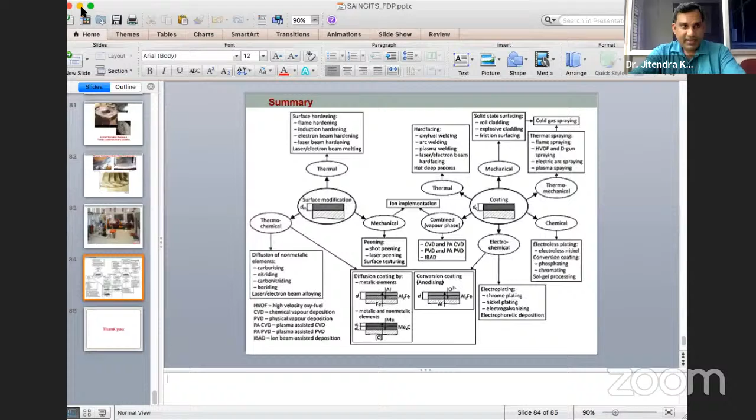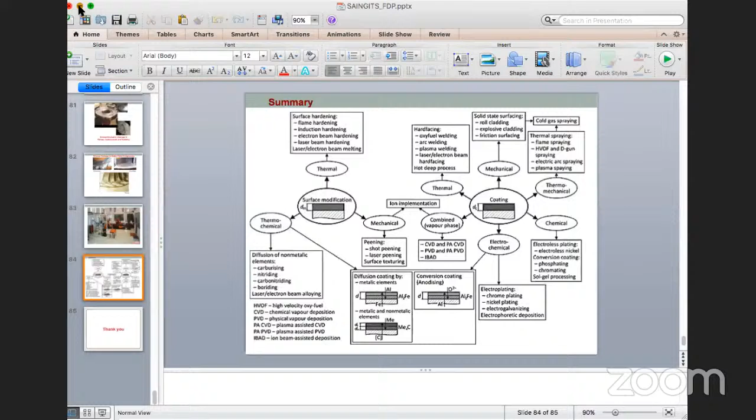Actually, I thought that I would just cover the basics. Yeah, definitely. That is required in the initial part. Everybody is a good researcher, so they perform some characterization. Yes. But there are several characterization techniques which are very important in all aspects. Which is necessary in their research, that is very important to know, because I faced that in my doctorate degree. What type of characterization do I choose for those composite coatings?

Some told me you can also perform Raman and XPS, and at that time this much knowledge was not there. So keeping that in mind, I presented very briefly all the surface characterization techniques, and I hope participants can choose according to their need.

Yes, sir, one question from Professor Shiva Subramaniam. Can you suggest new chemicals for chemical treatment? Chemical treatment for natural fiber. I have not gone through that in much detail for this fiber, but in one paper I have published, I forget the particular one, NaOH or something, it is used to enrich that particular surface. I don't know right now, but I will communicate to Dr. Chako, and he will share this information with you.